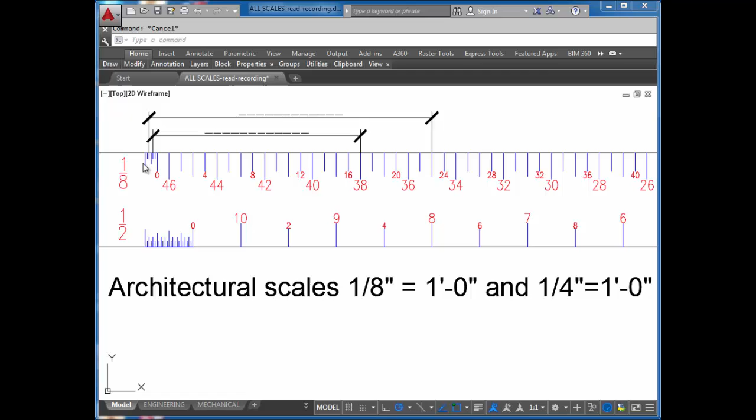We're looking at an architectural scale, and we're looking at specifically the 1/8 of an inch equals a foot and 1/4 of an inch equals a foot scale. So we have 1/8 of an inch equals a foot scale on this side. On the opposite side of the same scale, same edge, is the 1/4 inch equals a foot scale.

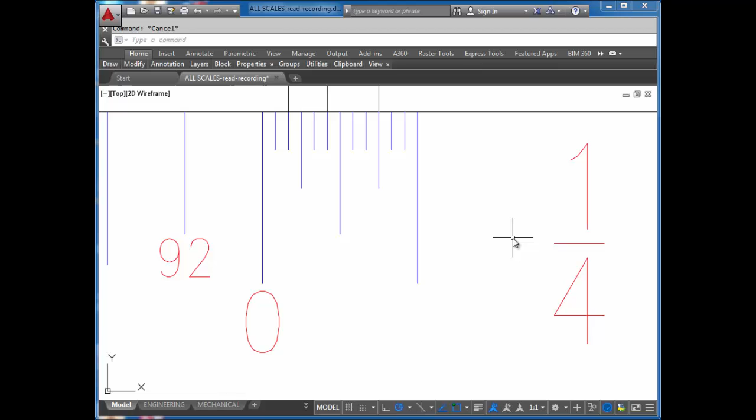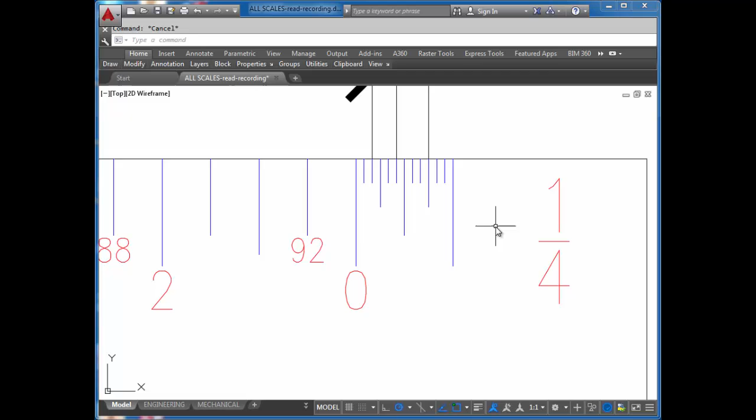Let's zoom in on the 1/4 inch and see what is our precision that we can measure in inches. Remember that the 1/4 inch equals a foot scale, like all architectural scales, has a section where we measure inches and then has a section where we measure whole feet. So this is representing a whole foot. And we have 1, 2, 3, 4, 5, 6, 7, 8, 9, 10, 11, 12 inches. And our precision for a 1/4 of an inch equals a foot scale is 1 inch.

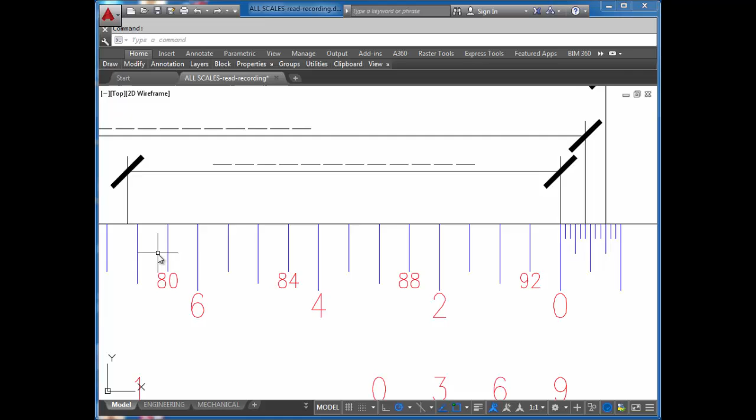Let's take a look at the first dimension. Remember to line up whatever it is you're measuring with the 0 mark first. Look to see if it hits a whole foot on this end. It doesn't. So here we have 0 feet, 1, 2 feet, 3, 4 feet, 5, 6 feet, and I know that's 7 feet. And I don't have the second extension line hitting that mark. I can't move it forward, otherwise I won't be able to measure how many inches are left over, so I have to move that dimension back so it hits that whole 7-foot mark. And then we can see how many inches are left over.

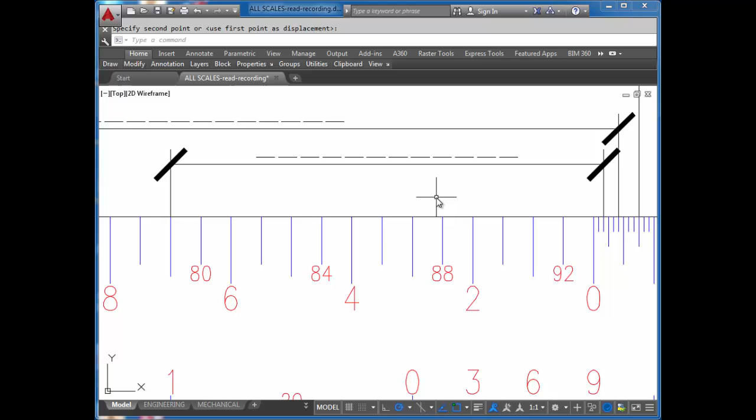Remember that the numbers that we see above, the 80, 84, 88, and 92, will have to do with the opposite side scale, the 1/8 of an inch equals a foot scale. So we're going to ignore those numbers. So what we have here is 7 whole feet, and we have 1, 2 inches left over. 7 feet dash 2 inches.

If we look at the next dimension here, again we're going to count up how many whole feet we have here on this side and then how many inches are left over. With this one, you should have gotten 13 feet. So we're at 12 feet here, so that must be 13. And we are 1 tick mark shy of that 6-inch mark, so that's got to be 5 inches. 13 feet, 5 inches.

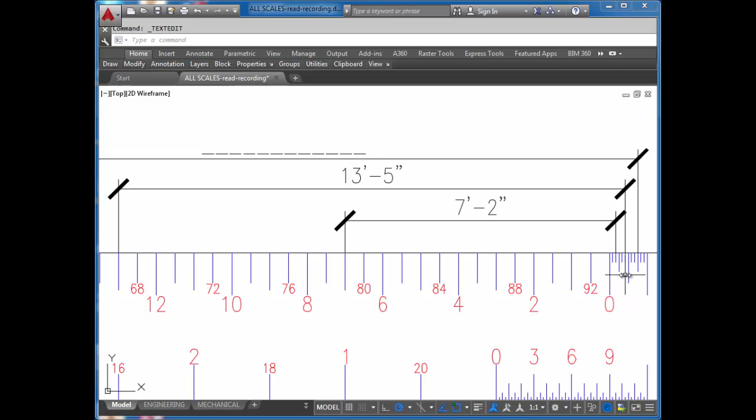And the next one, 18 whole feet, and we have 3, 6, 9 inches. 18 feet, 9 inches.

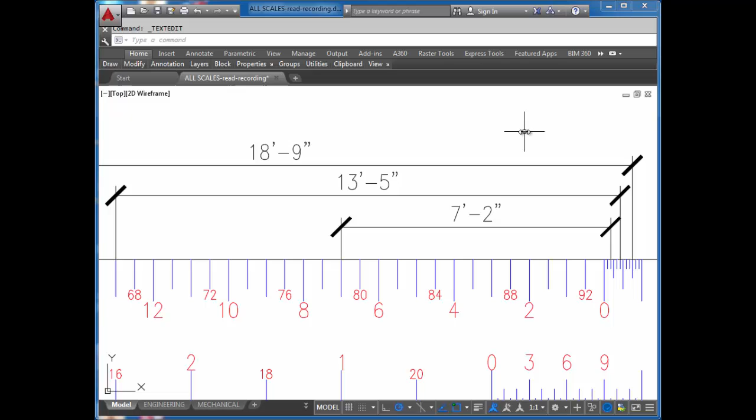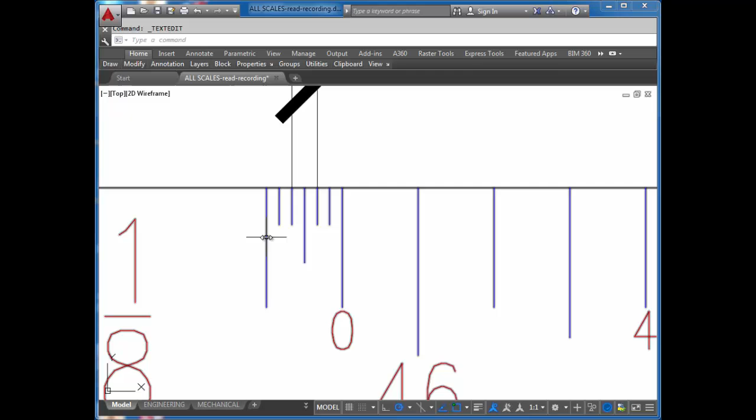Now let's look at the 1/8 of an inch equals a foot scale. This is representing a foot, but we don't have 12 tick marks. We have 1, 2, 3, 4, 5, 6 tick marks. So if this is supposed to be a foot, then we know that this has to be 6 inches. That has to be 6 inches. Then the only way that we can give value to these is to call this 2, 4, 6, 8, 10, 12 inches. So with the 1/8 of an inch equals a foot scale, we have the ability to measure within 2 inches precision. So remember that when you're reading that scale.

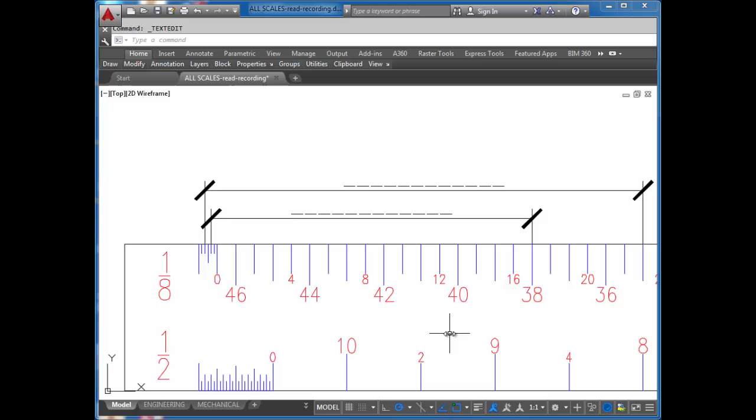Let's take a look at this first one here. Make sure you're reading the correct number for the number of whole feet. And then how many inches. So this first dimension would be 17 feet. This isn't 38 feet. We've got 16 feet here, so that has to be 17. And we have 2, 4 inches. So 17 feet, 4 inches.

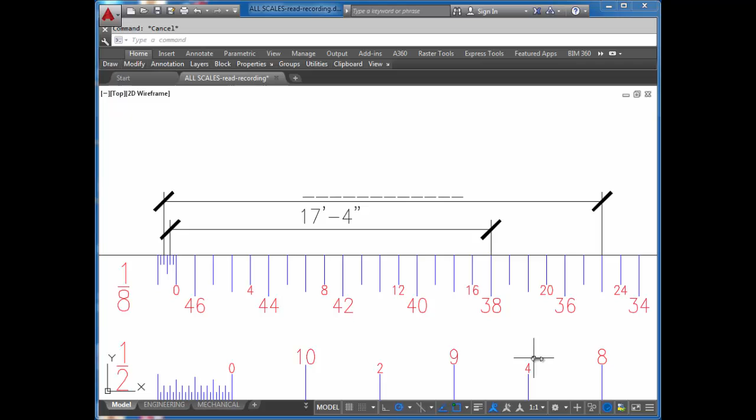The next one would be 23 feet, and we've got 6 plus another 2, 8 inches. 23 feet 8 inches.